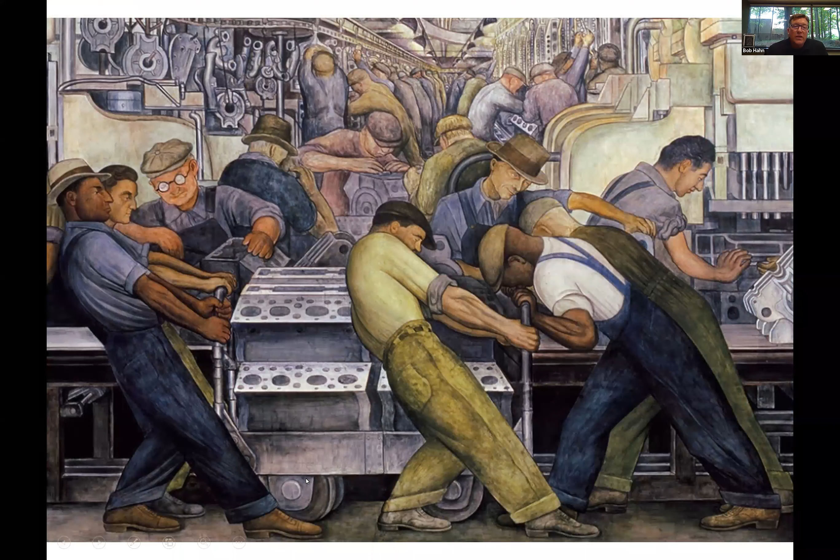You can see here that we've modeled a lot of stuff after the automotive industry as well. This mural at the Detroit Institute of Arts really says it all - people of all backgrounds working together, sleeves rolled up, gritty, working hard, along with engineering as their basis. That's how we feel about Lumecon, that we roll up our sleeves. We're all engineers at heart, even more so than our sales department. We really want to build the most robust, best fixture that's on the market today.

So even though the city sidewalk might have a little tarnish on it and everything else, we do clean up pretty nicely. We believe that with a little spit and polish, the city of Detroit is really coming into its own, and we wanted to represent that in our line.

So bringing that all together, all the design cues that we see around us here in Detroit - again, Joe Louis's powerfulness, and GMC, Ford, Chrysler, they're not afraid to badge their vehicles. They want you to know who made it.

They put it on not only on their grills, but they put it on their side badging. That's unlike a lot of other products, especially in the lighting industry, where in many cases it's very difficult to figure out who actually made it because there's no badging anywhere anymore these days.

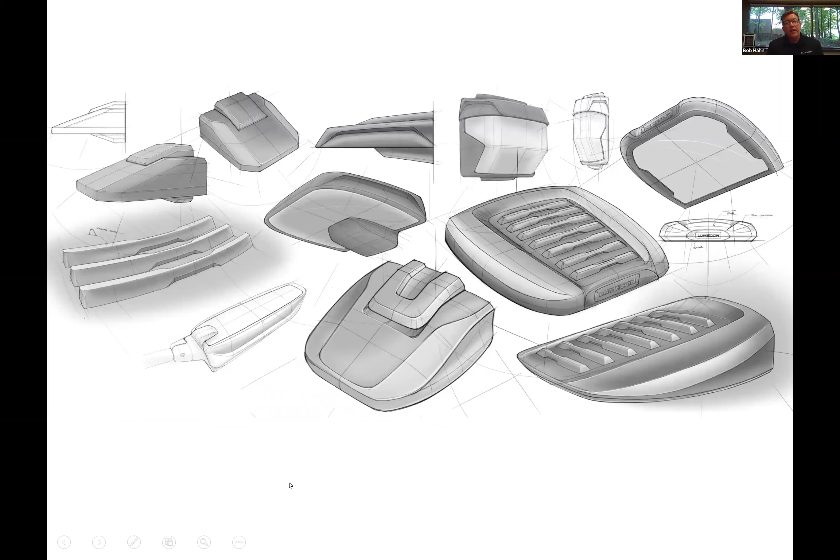So here are some of our very first sketches that we did of our forward throw area light and a full cutoff wall pack. And it morphed over time to where we actually went to blueprint, and we were bringing out our new area light.

So with no further ado, we'll start right in on this one, the small area light from our Detroit series. You can see that we put in heavy body lines, a grille-like look for the heat sinking. We actually cast our name right into the top and the bottom.

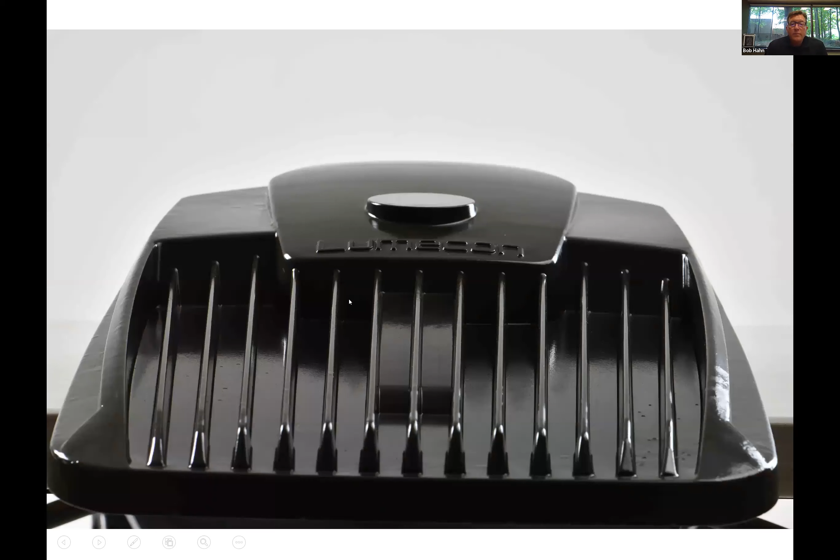It's a one-piece cast with a belly pan underneath it, so there are no moving parts, nothing's extruded and screwed together, no real places for leak points. And this is all done in Muskegon, Michigan.

Looking underneath, here's the belly pan, and then we have our custom optics from LEDiL that are screwed in on top of their LED boards to give you a type 2, 3, 4, or 5, or maybe a narrow and a flood option.

And here's our small area light, again just a one-piece cast with a belly pan we'll talk about in a sec. So here's an underlying look at it, and we'll show you the lensing in our LEDs.

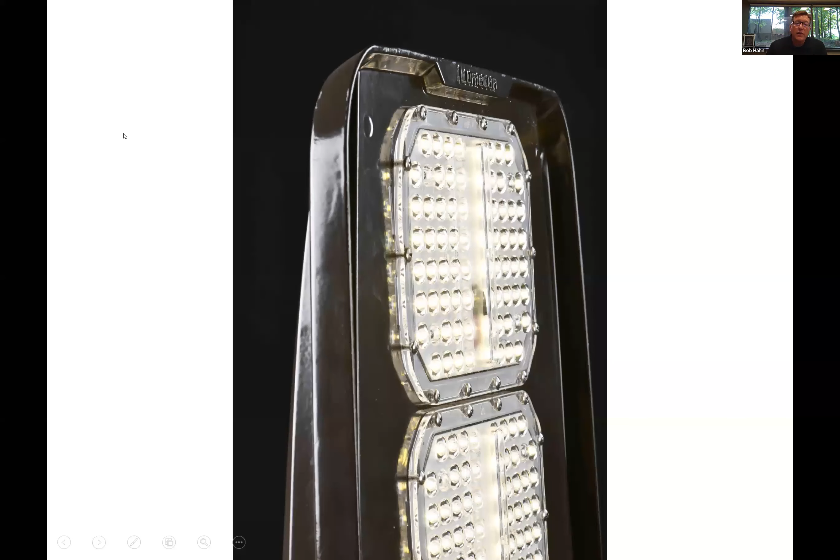We can handle anything from 2700K, 3000K, 4000K to 5000K, and all the different variations of light spread. Also here you see where we again cast our name into the bottom, so you can see it from both the top and the bottom.

And that gives you a really unique full cutoff that you can do type 2, 3, 4, 5 with, or a narrow optic if you want to do something funky. Basically, architects, specifiers, and engineers can actually say, hey, I've got a full cutoff that I can design with now, not just something that dumps light. So we're excited about that as well.

In fact, the lumen outputs and the spreads and everything else are exactly the same as the small area light, there's no difference between the two as far as that's concerned. And comparing it to current fixtures that are out there today, we are bringing a lot more style, sleekness, and identifiability to the Lumecon line.

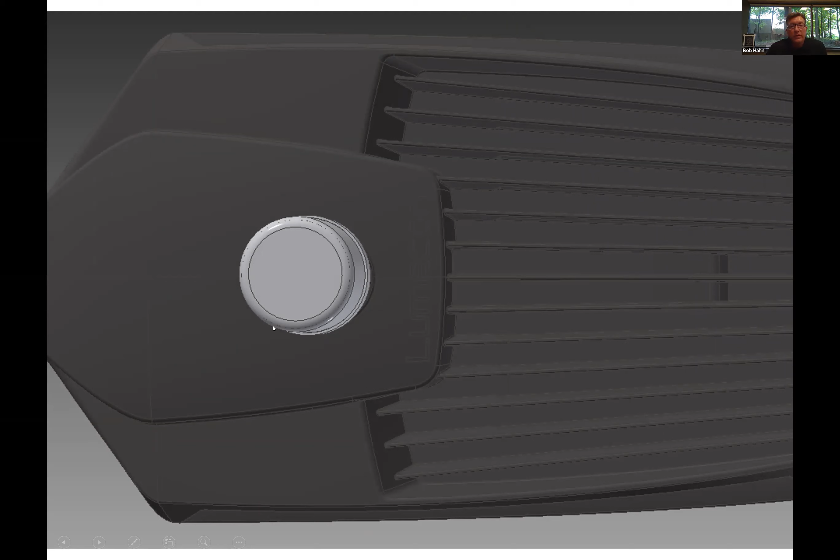So taking a top-down look here, you see at the very top we molded in a place for a twist lock photocell and/or a 7-pin receptacle.

Breaking it apart and looking at it forward, again you see the receptacle here, and this can be either a wireless control node or a photocell. Then below, you see we've got an occupancy sensor and our gasketed LED array that goes on top of the LED boards.

Now, these lenses are custom made by LEDiL out of Finland, and they have a patented boring technique to create the type 2s, 3s, 4s, 5s, narrows, with a raceway in the middle, so Michael is going to talk here in a second about the differences in photometry layout between us and maybe some of our competitors. You're going to see what a great job these lenses do.

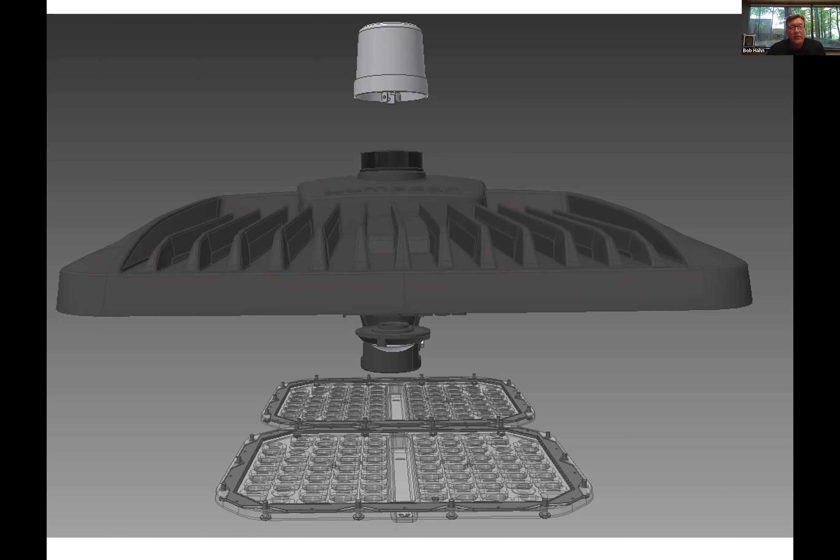So taking a look underneath, you see a great cutout of this whole one-piece cast, this whole thing here. And then there's the electrical section with a belly pan that goes on it.

I'm going to start off here in that we're using a hot poured gasket, a technique where hot gasket is poured in and then it solidifies. And that's done at Rumpf, a German company right down the street, a tier 1 automotive supplier. This is the same technique that's used for doors, trunks, and hoods to keep water out.

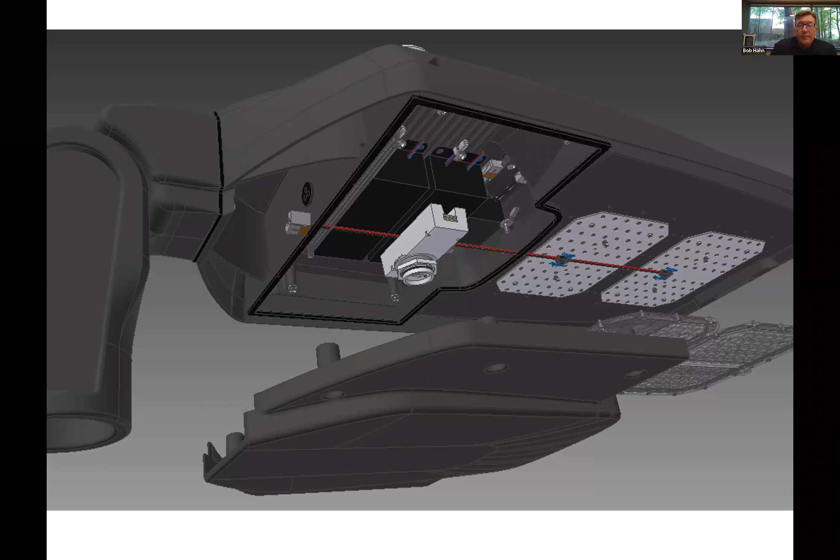And number two, have infinite number of openings and closings. Many other types of products use a die cut gasket, which usually only gives you one or two compressions, meaning that once you've opened it up and closed it again, it's already been compressed and not getting a seal anymore. Then you get leakage, water leakage, and that's a bad thing inside electrical components that can short everything out. So here you're seeing our poured-in gasket, which we think is a huge upgrade.

And then the belly pan, and here's an aux sensor that pokes its way through, so you're only seeing just the screwed-in bottom part and then a lens going on top of that. This is how it would look all assembled. So again, much like automotive, the less parts you screw together, the less squeaks, rattles, and leak points you're going to have in a product. That's what we've effectively done here with the large and small area light and also the full cutoff Detroit series.

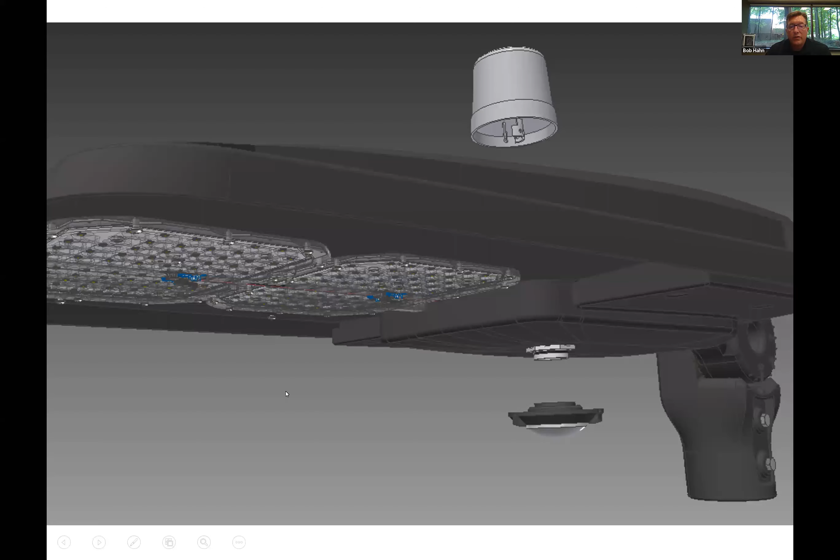We talked about the gasketing in the series. Here's where the gasket then goes. It is a single hot cast housing, like I already spoke about. There's an enlarged belly pan detail, and this whole belly fits 280 watt drivers.

This is a 40 kV surge suppression unit from Littelfuse. It's on the AC side, extreme rated so that when any kind of irregular voltage or a surge comes in, it gets stopped in its tracks before it hits the driver or the LED array. So this is our little black box, if you will, inside all of our products as standard, no extra cost. This is where you find what separates Lumecon from many other people who only have maybe 5 to 10 kV in their products. So it's self-containment for all internal control features too. There's no exterior boxes holding the aux sensor or any other exterior boxes for the receptacle. It's all self-contained inside the one belly pan.

You'll see here that we have 165 watt all the way to a 330 watt fixture. The lumen output is from 26,000 lumens all the way up to 47,000 lumens, from 160 lumens per watt to 143 lumens a watt. Well, what does that mean in photometry?

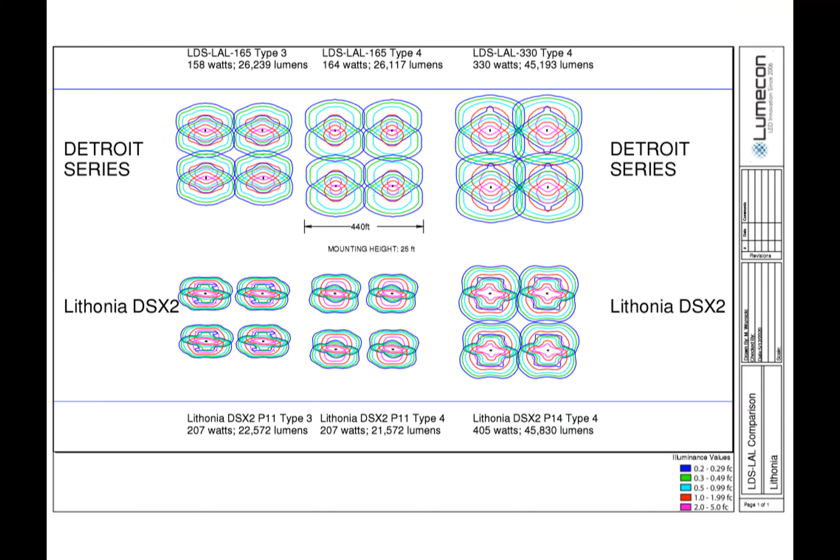Sure thing, Bob. We have two rows of aggregate groups of luminaires. At the top, we're looking at the new Detroit series area light, and at the bottom we're putting that up against a DSX2, a very popular outdoor light. You can see just with a quick glance, if we're doing a similar comparison, that we have a lot of distribution of the light that's very effective, what we've done with the optics all the way across.

For example, let's go over to the upper left corner. We're looking at the 165 watt in a type 3. We've got some back-to-back poles and an area covering roughly 440 feet. You can see that not only is the light being pushed away from the pole in a forward direction, it also has a wide lateral distribution, and we get good coverage throughout the entire area. Whereas directly below that with the DSX2, it's much more tight as far as the distribution, and there are some dark areas in between. In the middle, we look at a similar type at 164 watts and 26,000 lumens.

Right below that is the DSX2. It's using more watts and has lower lumens coming out of that. So the efficacy is not only a triumph with the Detroit series, but the distribution pattern between the two is pretty dramatic. I'm very happy to have this tool in the arsenal to go through any type of outdoor lighting, with this parking lot or elsewhere, and get what we need all the way through.

And then, of course, on the right side, the big guns, we're looking at 45,000 lumens, which is a pretty good amount of torque when you need a lot of area to be illuminated all the way across. Again, you can see that whether these are type 3s or type 4s with the Detroit series, that forward push, the wide distribution, and a lack of concentration of a hotspot underneath all the way across is actually a very excellent approach for how we're doing the distribution types.

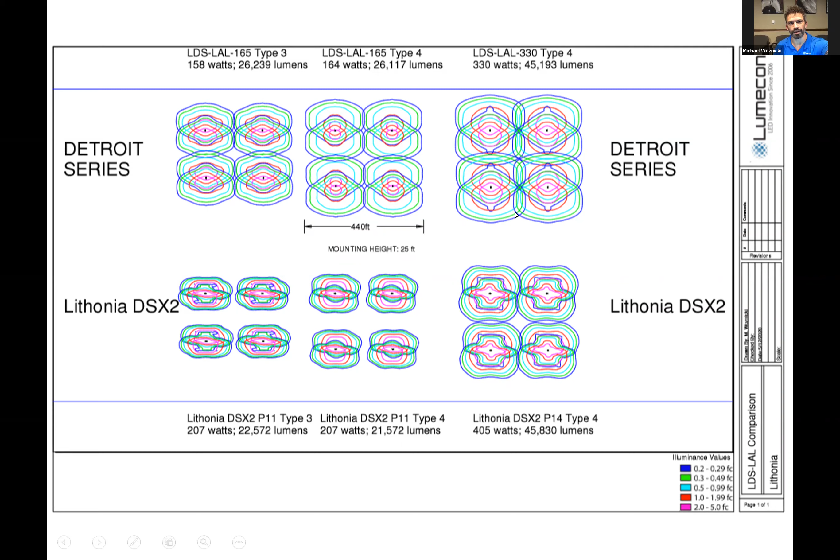Backing up here for just a second, I wanted to show you that the actual product is available. The cut sheets and IES files are now online. For the large area light and small area light, they should be up by tomorrow. But they're available in 3000K, 4000K, 5000K, and also 2700K, in 70 CRI, 80 CRI, or 90 CRI.

Why would you ask for 90 CRI outside, why would you do that? Well, there are some federal regulations out there that require 90 CRI for outdoor lighting. And also, some architects have been designing downtown streetscapes in 90 CRI so they're getting a real punch onto the businesses down there that have storefront displays.

Looking at the small area light, we think that out of every 11 lights, this will be 10 of them, because it goes from 30 watts to 160 watts, and lumen output from 4,600 all the way up to 23,000. To really put that in perspective, what it can do, I'm going to jump here and let Michael take over again.

Here's another comparison that we've got. We're looking at 160 watt type 4 and 125 watt type 5, the different types for the most common application distributions. And we're stacking those up against the Galleon and again, the DSX2.

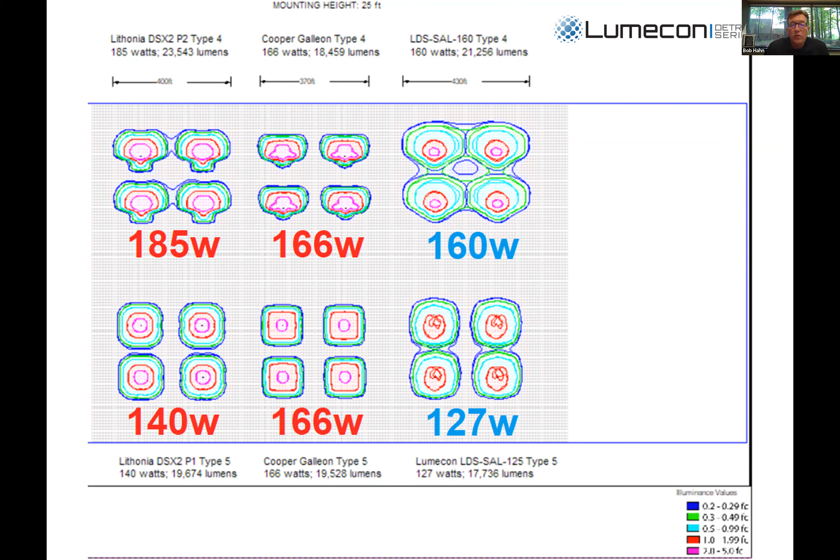It's not about how many lumens you have, it's not about the lumens per watt, it's what you do with the lumens that you're producing and at what wattage. So the two combined, the uniformity and the wattage being used, really trumps the LPW and the total lumen output. Just wanted to note that.

Here's the view again. Now, one final thing we take into consideration when designing a project, when we're running a photometric analysis, is that not only are we going to light up the project we have, we have to take into account what's in the surrounding area.

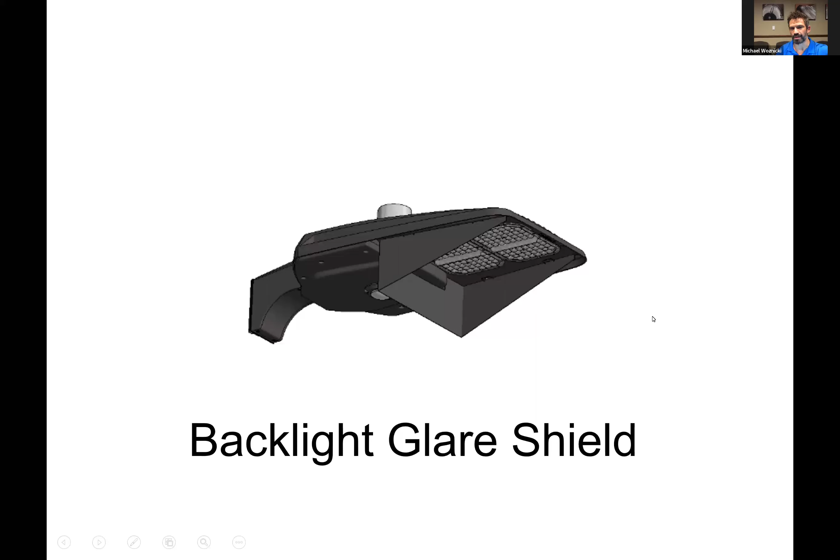For example, if we have a parking lot and it's next door to an adjacent residence, well, first and foremost, we have to make sure that everything is taken into account. If we are doing a great job illuminating the parking lot, with our distribution patterns down and uniformity, but there's a lot of spillover into that residence next door, well, then that's not a successful project.

So what we do have as an option is the Backlight Glare Shield. This is a very simple design. It's elegant in that it can just be placed on and it mitigates that backlight. It doesn't actually interact with the forward amount of light going through, getting it away from the perimeter into the lot itself.

But the spillover that would be coming backwards just from general physics of the placement of the optics, the simple Backlight Glare Shield can really mitigate those candela values coming backwards and have a big impact on making sure that throughout the entire area, we've got a successful project.

That's correct. And we emphasize what Michael just said, and that is that we're able to do backlight glare control with type 2, 3, 4, 5, and narrow, using a color-coded backlight glare shield that's the same color as the actual fixture.

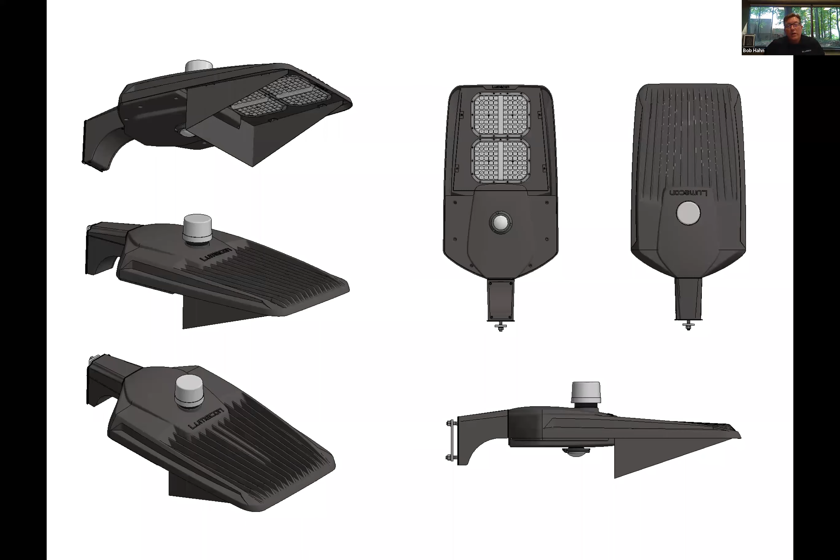We don't want a specular material on that because then it would actually degrade the spread of the lenses, causing backscatter to interfere with what we're trying to achieve. So the whole goal is just to knock down all lighting going out the back and the very ends of the sides. That's why we did it, so you don't have to compromise the design of the layout. Nor do you have to settle for an optic that's been painted on the back side, or one where only one optic is backlight controlled while everything else is standard.

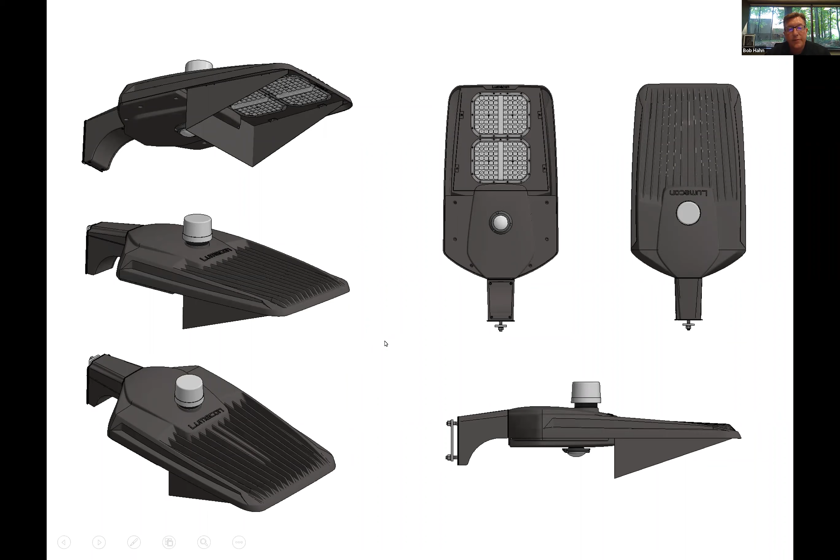So that kind of wraps up the two area lights and the full cutoff light.

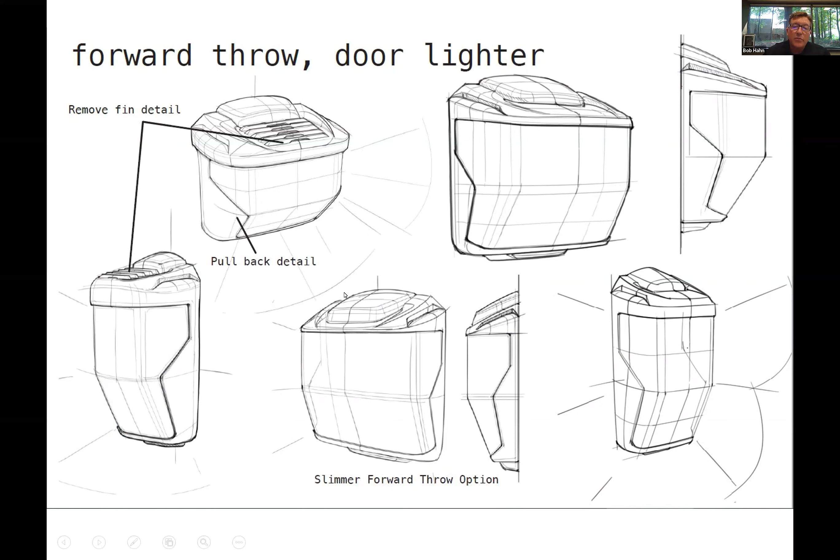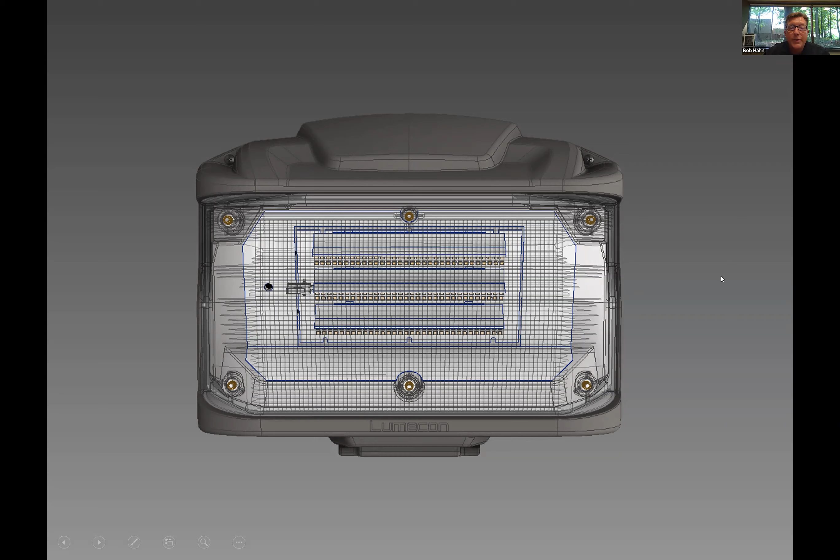I'd like to jump in a little more now into our full forward throw Detroit series area light wall packs. These two fixtures came out about 6-7 months ago, but we've also made some enhancements recently that we want to talk about. So real quickly, let's go through the actual original design, and you can see that we've cast our name into the front there. This design is a bold, kind of a pickup hood look, if you will, with bold masculine bone lines on top.

Looking at the side, we have a very small footprint as far as how far we stick out, but we still have a lot of room inside to add battery backup, occupancy sensing, and photo control.

So breaking this apart, what you're seeing here first off is a lens that's got a 20-year warranty against yellowing, from Lexalite. We tooled this with them to be a nice, uniform, farthest throw, forward throw product that we could put on the market today.

And then this lens gets sucked in by these screws. So we put brass inserts in here due to freeze thaw and some other reasons, as far as torque goes, to make sure that we don't spider crack the lens, not only today, but 10 years from now.

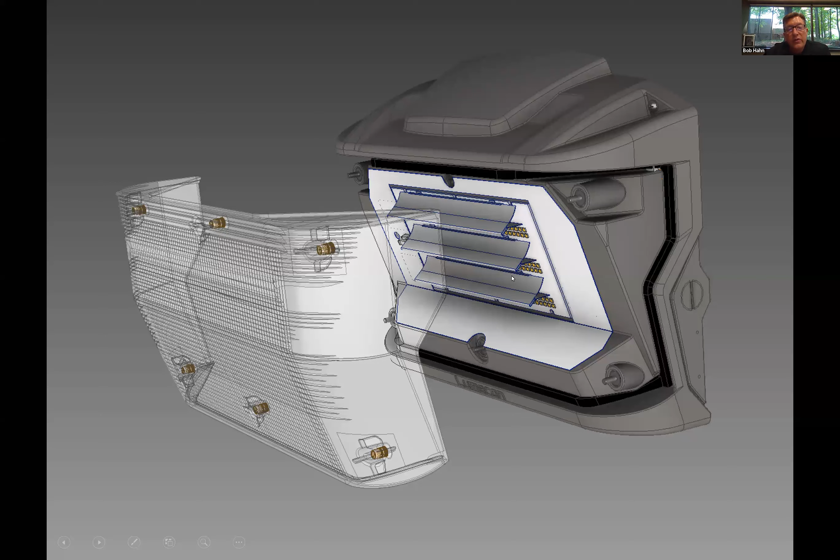Also, we had installed here for DLC purposes, these Alzak reflectors. What those Alzak reflectors allow us to do is put minimal light that goes above 90 degrees, and keep the 80 to 90 degree spread below 10% of the total light output. So most of it is 80 degrees and less, so that you're really doing a nice job of keeping up light from going out while still throwing the light out.

But we also created a new HE2 max light output by eliminating these reflectors. We've been able to drop the price $20 and get max output using just the great prismatic lens, getting a great forward throw with a higher lumen output.

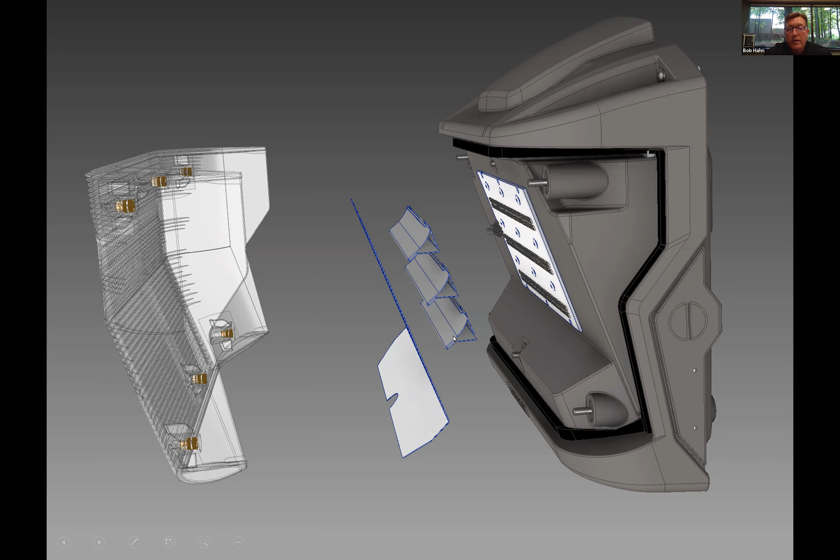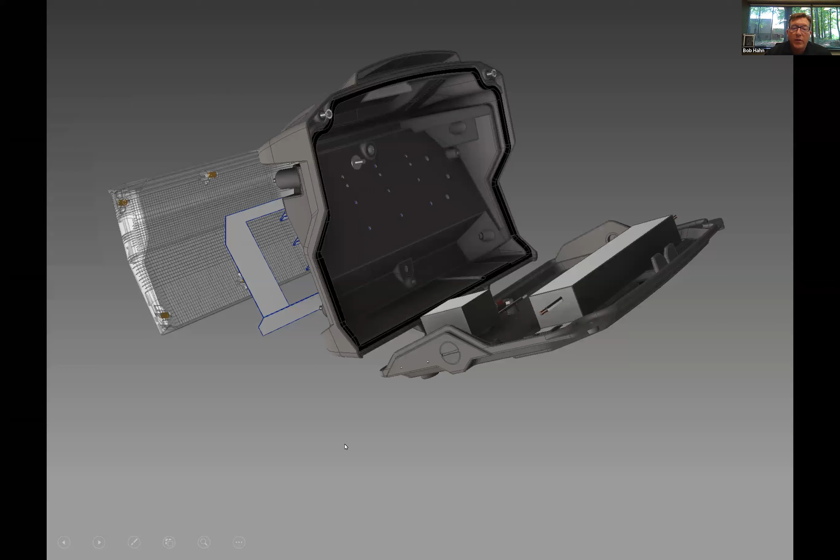You can also see here too that we've used again our poured-in gasket, and that's what seals in this lens, keeping the LED array dry throughout the whole process. And then looking at the back, we use another poured-in gasket on the back side so the electricals close up and stay there. Again, you see our standard 40 kV surge suppression extreme rated, our programmable advanced Philips driver, and there's also room in there for battery backup, photo control, and occupancy sensing as well. We've made allotment for all of that.

Bringing that together, I want to show you some of the new advancements, but some of the advertising you're going to be seeing coming out is the fact that we're inspired, designed, engineered, cast, injection molded, built and delivered in the United States. So this whole process starts in Muskegon, Michigan, 200 miles away, not a half a world away.

And we pour the aluminum into the casts. Then we bring them close to here to Farmington Hills. We have them painted, then gasketed. Then we marry up the LED boards that we're having made locally along with populating the LEDs. We marry it all together here in Farmington Hills to give you probably the most USA contented LED fixture that's on the market today.

To tell you about some of the efficiency upgrades to the wall pack line, I want to jump here. This is our Lumecon Detroit Series Forward Throw Mini. Now it's really not a mini, and here's what I mean by that: we have it DLC qualified, and we added a 35 watt version at 4,400 lumens.

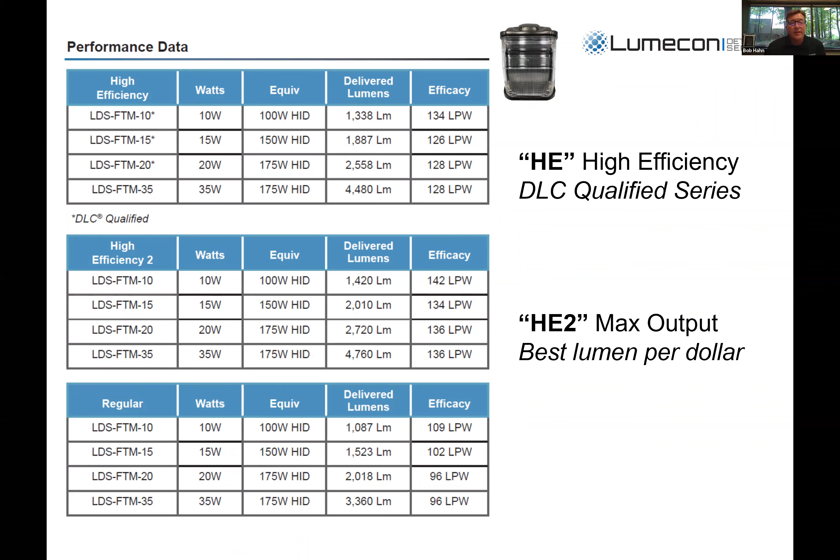We also have a 35 watt version in our HE2 max output, best lumen per dollar. This is actually less expensive than the DLC version, probably less than the rebate you're going to get if you use DLC, and you're going to get 35 watts up to 4,700 lumens. And then we have our value line, our Detroit Series regular lowest price, lowest lumen output line, to compete on some lower price ranges. But looking at this, it's probably the best dollar value for the dollar.

And we also want to say to you that if you're replacing a 175 watt metal halide, or you're designing a 175 watt metal halide type forward throw, this fixture here is the one that you want to use.

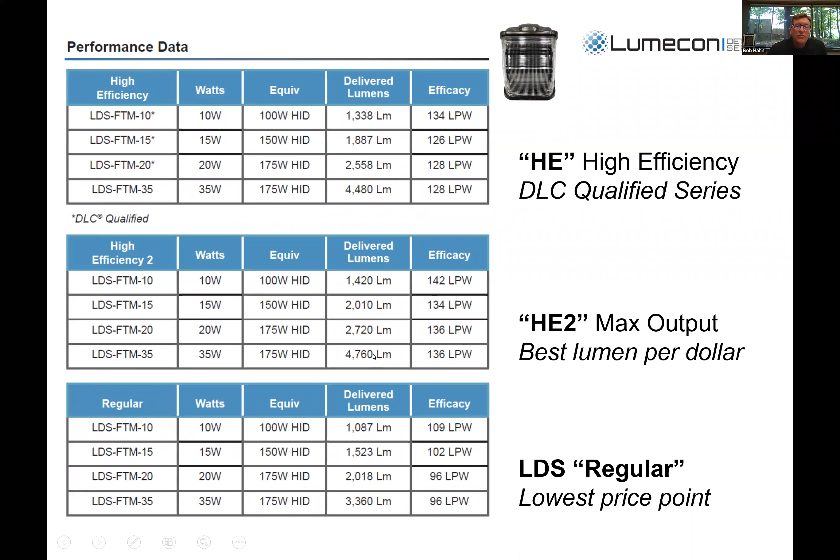Even though it's a smaller footprint, it still puts out nearly 5,000 lumens and gives you a great spread. And it's also very cost effective.

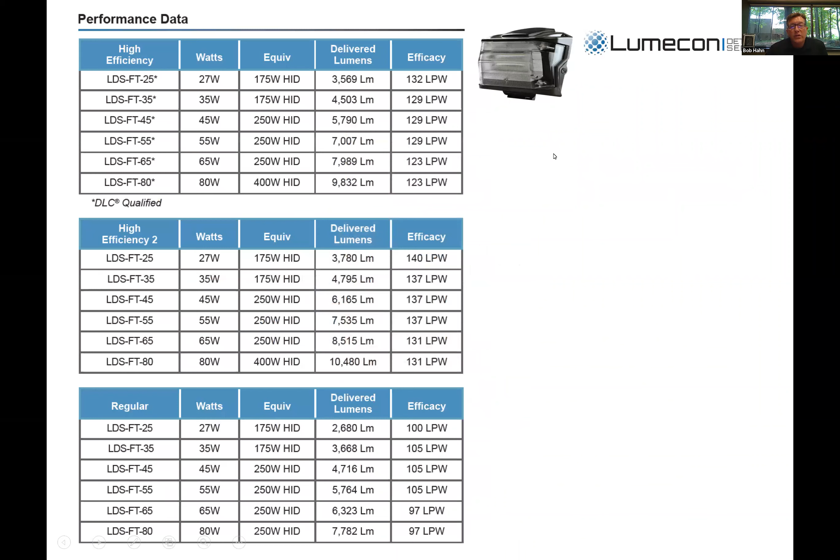That compared up to our Lumecon Detroit Series Forward Throw regular size, you can see that, again, we have a DLC version and an HE2 max output version, and then our regular version. But I do want to point out that you probably don't need to, essentially in the small housing, you can get to 4,700 lumens at 35 watts.

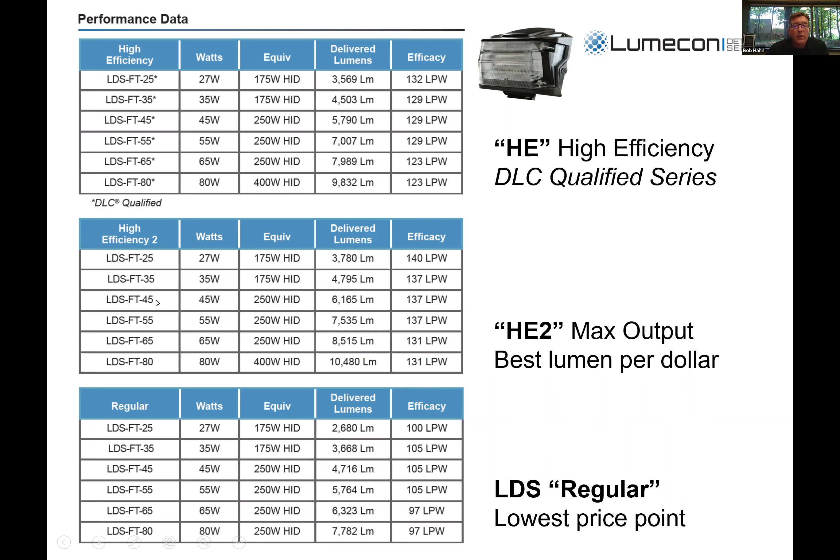You don't really need this fixture in 25 or 35 watts. I'd start using it at 45 watts up to 80 watts, and you're getting 10,400 to 10,500 lumens out of it. So that becomes very cost effective when you're up in this range. So again, using the smaller one at the 25 and 35 watt range and down, and then using this one between 45 and 80 watts.

So bringing this all together, you can see our design. We're putting the LED array right onto the casting, bonding it to it so that we're getting the maximum thermal dissipation. We still are using very expensive ceramic based epoxy slurry LEDs that are the best in the market today.

And because we're using those LEDs, those are 60-cent LEDs versus a 0.6 cent LED that many of the very inexpensive wall packs and area lights are using. Those LEDs are not going to last very long. It's not that they're going to burn out typically, but they will lose their light output dramatically, especially in freeze-thaw cycles over a very short period of time.

So we believe in our enhanced thermal design system from beginning to end, LED die all the way out, to make sure that we're dissipating the heat. And we can rate ourselves at 100,000 hours, but really and truly our lifespan is much longer than that.

Again, we're using tier 1 componentry only. So LEDs are using Nichia, Cree, Samsung, Osram. In fact, our area lights, we've set it up so that we can use any of the 4 in case there's a shortage on any of these components.

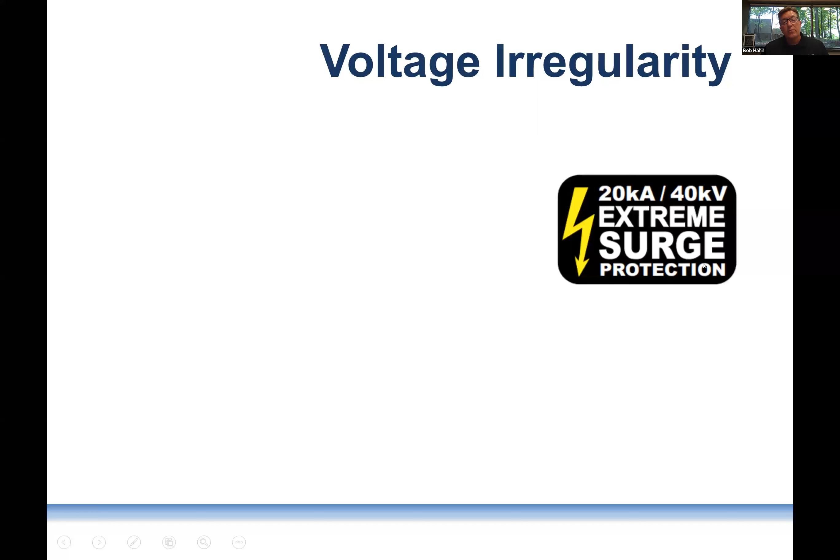And so about 3.5 years ago, we started to put in a 40 kV extreme surge protection metal oxide varistor in order to combat dirty power and irregular voltage, whether it's the HVAC kicking on and sending down a bit of a spike or a lightning strike, or just a grid that's really running rough.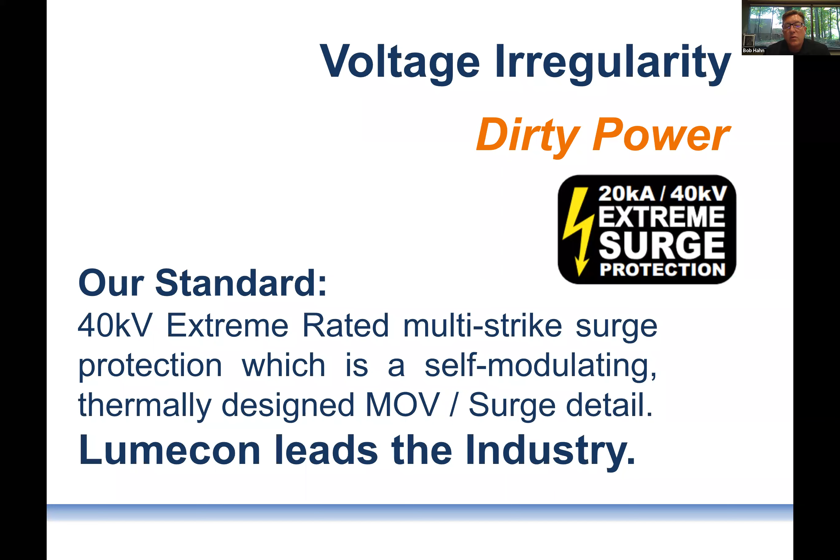Our 40 kV extreme rated multi-strike surge protection is self-modulating, thermally designed metal oxide varistor. And it is, again, our little black box, if you will, like an airplane has, that can tell us what goes wrong inside of a fixture if there's any kind of a surge event.

So all of this together allows us to meet every Buy American Act certification, along with our small business certification. That's how we've been able to win so many federal jobs and municipal jobs around the country, because we're meeting the Buy American Act level 2 and in some cases level 3.

There's a lot more people out there also. We've heard from you, our agencies, we've heard from end users, that end users now and contractors and even distributors are starting to ask for made in America product. And it's not always the cheapest is best. So we wanted to let you know that we qualify for all of these, not only to try to meet some kind of a standard, but also it's what we believe in.

So wrapping that up, that is the Detroit Series line. Again, we're inspired, designed, engineered, cast, injection molded, built, and delivered, all right here in the United States.